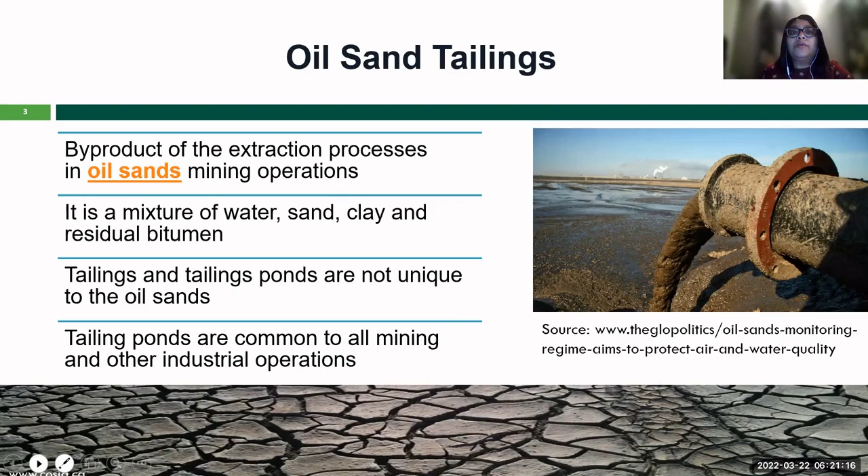What are the environmental impacts of oil sand tailings? If we talk about all the systematic environmental impacts, first of all is the toxic slurry of heavy metals and unrecovered hydrocarbons. This is the big concern. Giant ponds of toxic waste create air and water pollution. Leakage can pose a great risk for wildlife, especially aquatic organisms.

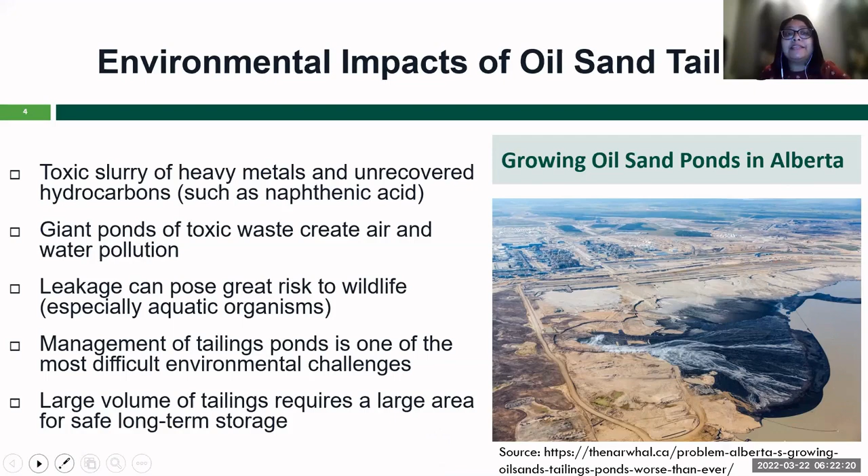Management of tailing ponds is one of the most difficult environmental challenges that we face, especially in the province of Alberta, because most of our oil sand production is from that province. And these are the growing oil sand ponds in Alberta that we can see. Large volumes of tailings require a large area for safe long-term storage. We need proper management in place so that we don't face environmental challenges from these tailings.

So what are the management processes in place in Canada? If we just summarize quickly: oil sands mining recycles 80% of the water used during the production process. So water recycling is already in place. Rather than using fresh water every time for recovery, the use of recycled water is in practice. 80% of the water used is recycled during the production process.

Tailing ponds are constructed with groundwater monitoring facilities, so that continuous monitoring is in place for groundwater pollution and any kind of leakage during contaminant transport. Steps are taken to prevent birds from landing in the tailing ponds, which can create environmental hazards.

Future tailings require smaller ponds and faster reclamation. So the goal is to have smaller tailing ponds so that they cannot create environmental hazards, and also faster reclamation, meaning the reclamation of these tailings is much quicker, so that the overall impact on the environment is minimized.

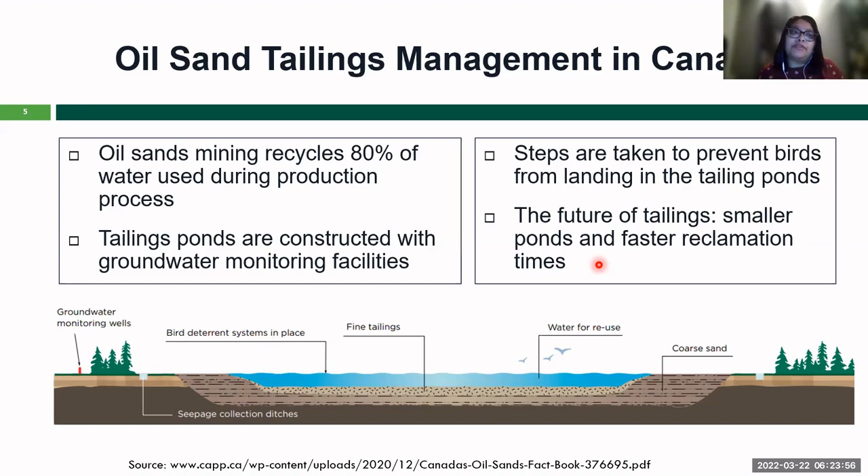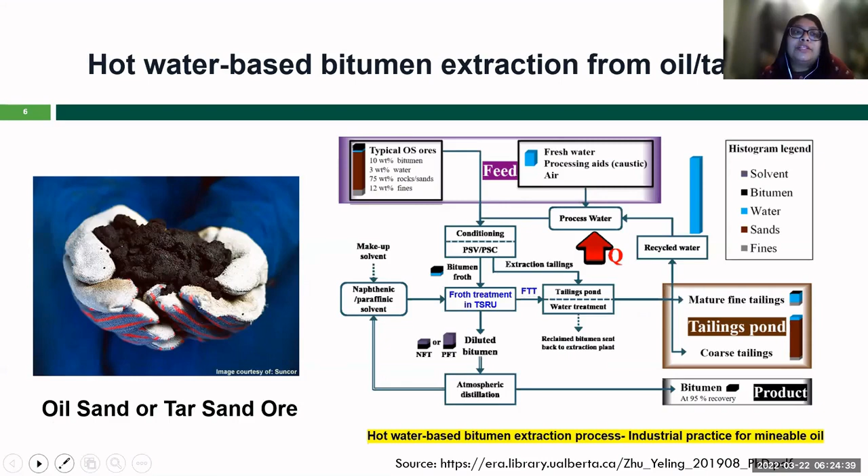What is the current processing of bitumen extraction from oil sands? Currently a hot water based bitumen extraction process is widely used, but there are some operational and environmental challenges. Because of that, solvents are used to minimize the end product of the tailings that is dumped in the tailing ponds. The solvent used for treating those tailings goes through the tailing solvent recovery units.

And the reason I'm bringing this up is because I'm going to talk about the end product coming from the tailings solvent recovery units. These units are used to strip off and recycle any residual solvent prior to disposing the froth treatment tailings in the storage pond. They are a modified version of the traditional flash columns and use temperature and pressure to recover solvent. Solvent-free tailings are then stored in the tailing ponds for future reclamation.

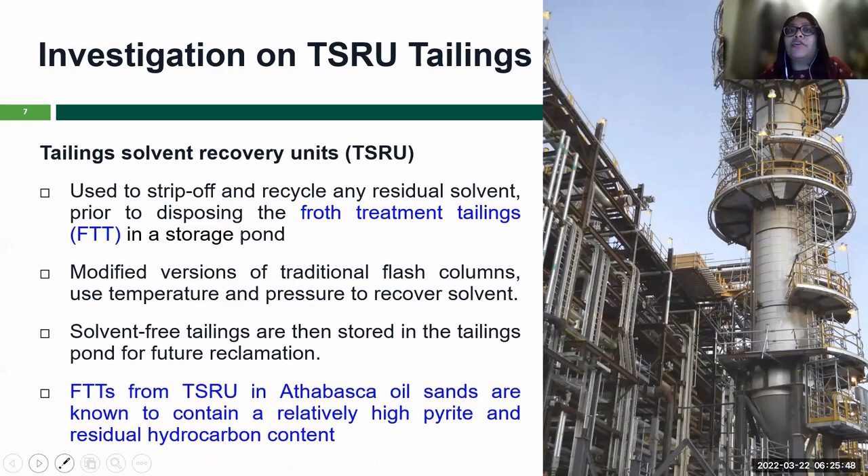And this froth treatment tailing, which we are calling FTT from TSRU, is from the Athabasca oil sand, which is a particular oil sand location in Alberta, known to contain relatively high pyrite and residual hydrocarbon content. Due to this high pyrite and residual hydrocarbon content, there are issues that we see, known as acid rock drainage from the FTT deposits.

So what is acid rock drainage? It is an acidic effluent generated from sulfidic waste rock piles or tailings. So sulfidic waste rock piles and tailings will cause this kind of rusty water, orange in color, because of the sulfidic waste rock that gets oxidized in contact with the air and the environment.

And ARD resulting from pyrite oxidation in FFTs, the fluid fine tailings, is the largest environmental liability facing the Canadian mining industry. The amount of acid producing mine waste in Canada is estimated to be 2,650 million tons, causing an environmental liability of $2 to $5 billion. So this is a huge concern.

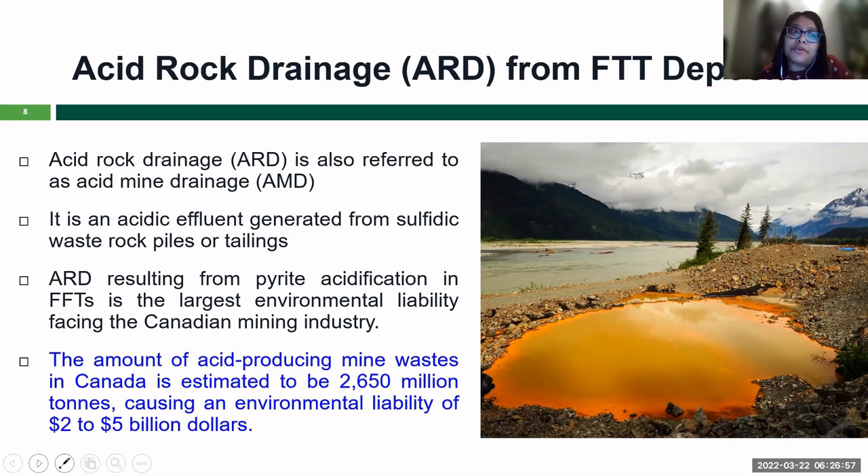And I will just go over quickly the oxidation process that causes acid rock drainage. So if you look into this equation about the oxidation process, I just mentioned the acidic toxic environment produced from the oxidation of sulfide minerals like pyrite. So this equation presented for the oxidation process and formation of acid rock drainage is in the presence of IOM and SOM. IOM is the iron oxidizing microorganisms, and SOM is the sulfur oxidizing microorganisms.

So if we now look into the ferrous iron present in the system, it oxidizes and produces ferric iron that precipitates in the system and the environment, and that also further oxidizes. And if you look into the further oxidation, it further oxidizes pyrite again in the presence of IOM, iron oxidizing microorganisms, and produces thiosulfate. Thiosulfate oxidizes to sulfuric acid, which is acidic in nature.

Sulfuric acid will create the acidic environment in nature, and there is a presence of sulfur oxidizing microorganisms in the process. So IOM is mostly present at the lower pH level. IOM is sensitive to the lower pH level, so it's present there, but SOM is present in a wide range, which creates microbial succession in the development of ARD.

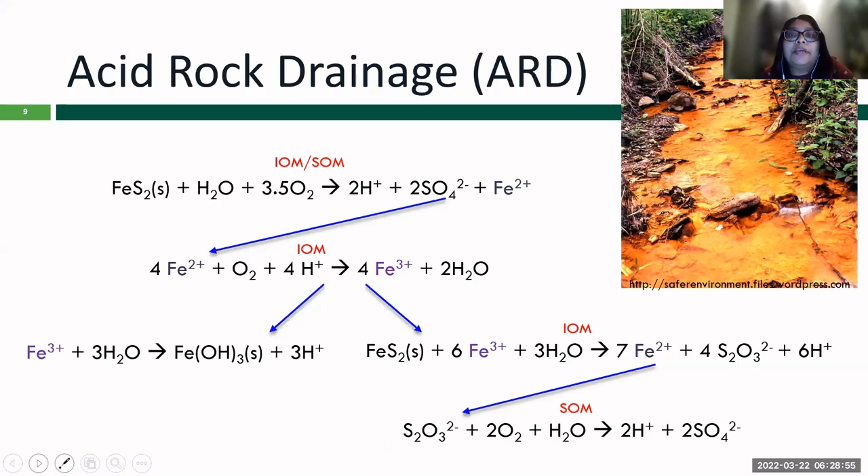So talking about ARD treatment and prevention, innovative techniques can be applied to ARD prevention. ARD treatment and prevention can be with chemical neutralization or water capping, which is tailing ponds.

And the phage present in the environment, that means the bacteria present in the environment, can be studied to understand the amount of bacteria, type of bacteria, and whether it is IOM or SOM, iron oxidizing microorganisms or sulfur oxidizing microorganisms. And then understand the process of phage transport through the tailings. So that can also minimize the sulfur oxidizing process and create a neutral environment so that acid rock drainage is no longer available.

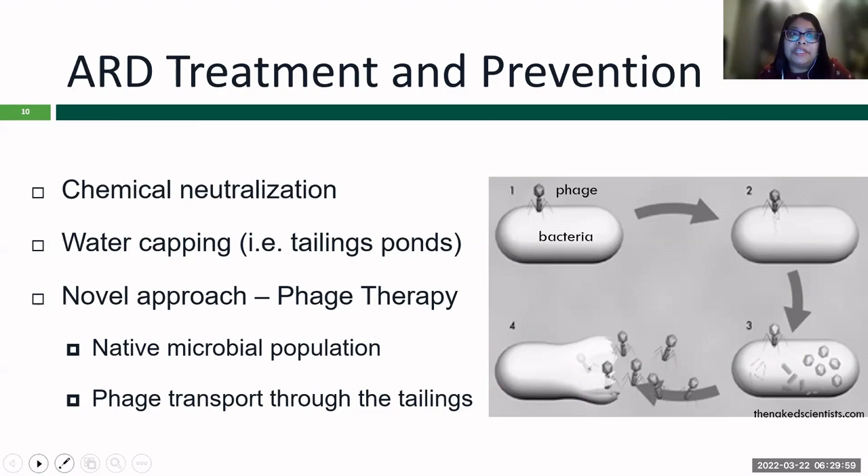Having given the background, now I'll just go over the research goal that we have looked into. So our main goal was to investigate the geotechnical and microbiological properties of untreated, polymer amended and sand mixed TSRU tailings. So specific to the TSRU tailings, we have tested a few different types of materials. One is untreated TSRU tailings and the polymer amended TSRU tailings, and then we also tried sand mixed, so that the impact of the sand was also studied, to provide information for the consideration of subaerial deposition, and increase the knowledge about these unique tailings in management application.

So if we look into the objectives and scope of the work: isolate and characterize the native microbial population of the TSRU tailings that would be related to ARD generation, and also determine the geotechnical index properties and unsaturated geotechnical characteristics of the TSRU tailings. So that was also studied.

The collection of the TSRU tailing samples was performed by the operator in June 2012. There are two types of materials collected: no polymer, so no polymer was added to the TSRUs, untreated ones, and then polymer treated ones. Then we have used the sand mix to get the overall picture that I just have described.

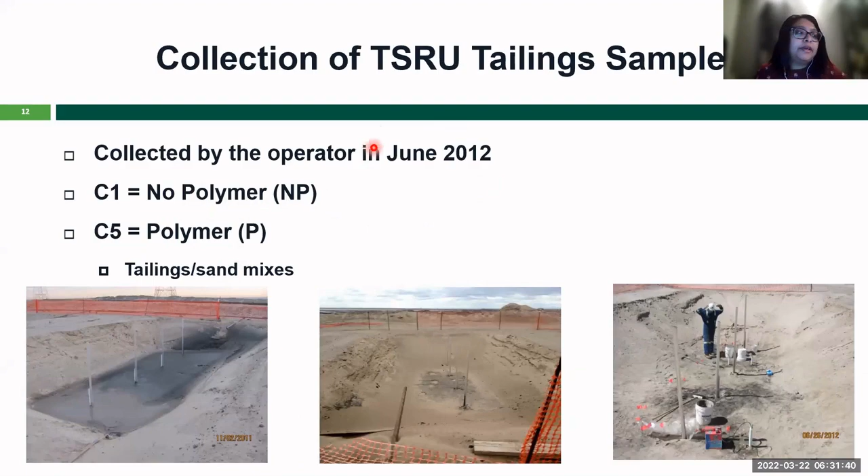So first we will talk about the microbial methods that we have used. In the microbial method, we have used 3 reactors with 3 different pH. The values shown over here are 2.5 pH, 4.5 pH, and 7 pH. In the reactor, we have inoculated with 25 grams of TSRU tailings, and we used isolation for 6 days, 120 days and 350 days when we ended the test.

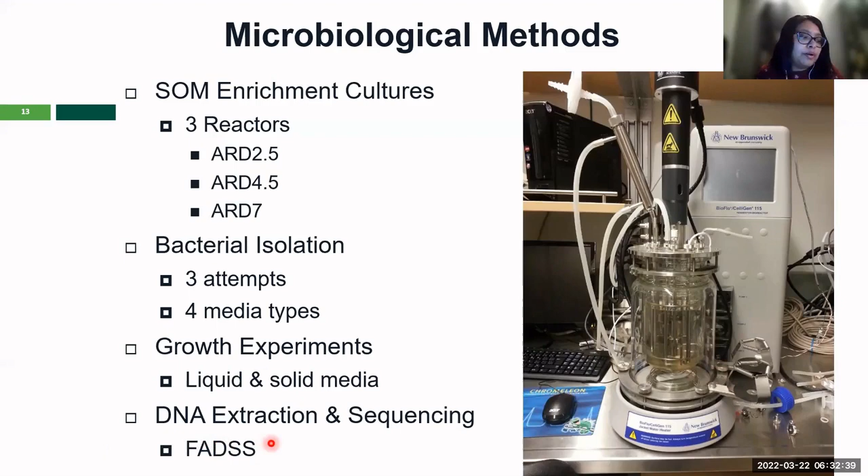And we looked into the bacterial isolation from the TSRU. We wanted to find out what are the native bacteria present in the TSRU we have collected. Then we used different media to see the growth of these microorganisms, and then worked on the DNA extraction. So what we have looked into within the 3 different pH, we can see those behaviors now.

If I just summarize them, not going into the detail because I know we are engineers, so we don't want to get into the microbiological details, but there are some interesting facts that we can talk about from here. The pH 4.5 had the highest richness with 5 isolates. That means 5 different types of bacteria were found during this isolation process. So we had 5 different isolates with pH 4.5, and pH 2.5 and 7 had only 3 different types of isolates. The units that we have here are colony forming units per milliliter.

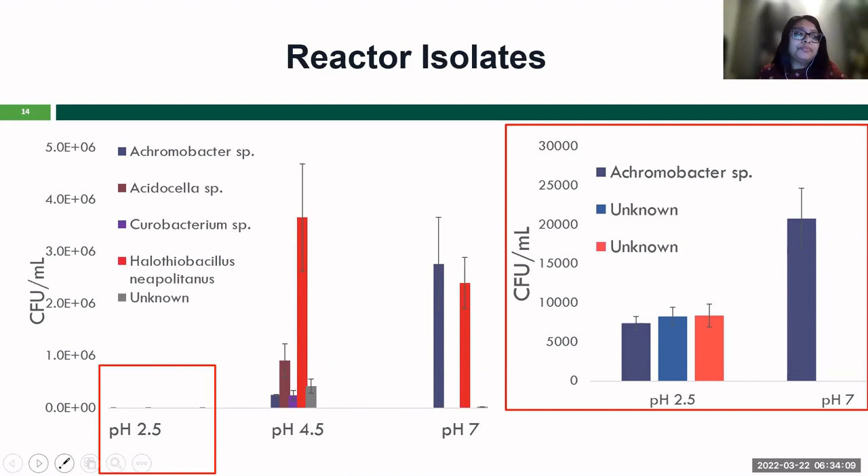Most of the isolates that we have found are known for oxidizing iron and sulfur, so iron oxidizing microorganisms or sulfur oxidizing microorganisms. 3 of these isolates are found in the ARD environment, and 1 has been documented in oil sand tailings. So that's what we can analyze from the microbiological isolates that we have found from the reactor tests that we have performed.

If we just summarize our microbiological data, we did a preliminary analysis of the microbial community that is of interest for ARD, acid rock drainage. That means 2 different types, iron oxidizing microorganisms or sulfur oxidizing microorganisms. Enrichment cultures revealed relatively low diversities using culture-based techniques. We isolated some organisms previously found in ARD sites. We checked that with the literature, and that was exciting, and established the presence of microbes capable of acid production and iron and sulfur redox in TSRU oil sand tailings. This provides a foundation for identifying microbial targets for phage therapy.

If you remember, I mentioned the innovative approach that can be taken by identifying the microbial community and then allowing that microbial community to transport within the TSRU or the sand tailings, and minimize the ARD environment. So bringing the pH level to neutral, so the acidic environment is no longer present in the tailing ponds. So that was the summary from our microbiological activities that we have performed.

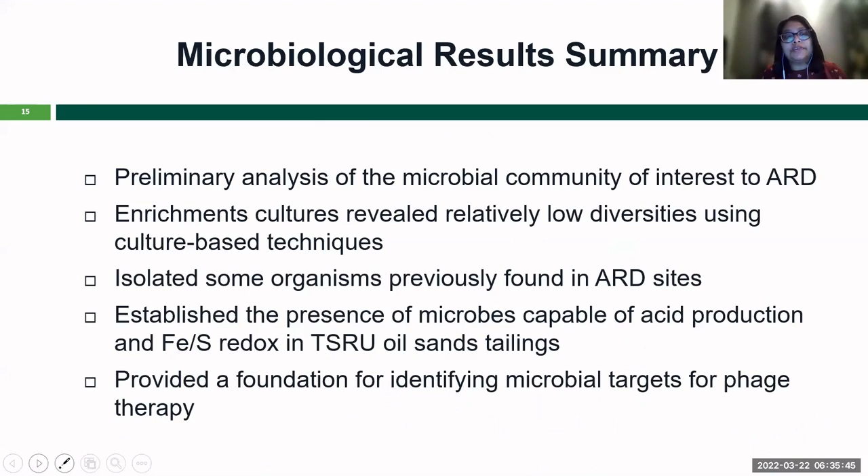Then we move on to the geotechnical methods that we have undertaken for these TSRU tailings. Our work was divided in several segments. It was identifying the index properties, as you know, all the basic index properties we perform for any geotechnical material. Then we have worked on the salinity, SEM, data analysis, and performed a shrinkage test.

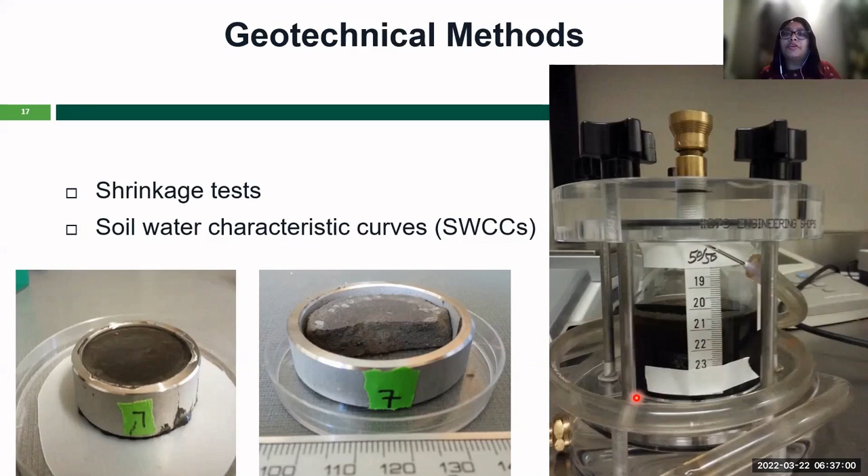It was interesting for us to look into the shrinkage test, starting with the slurry material in the rings and allowing it to dry in a natural air environment at room temperature, and then taking measurements of the height and the diameter of the material over a period of 4 months. Continuous readings were taken, and we also used a Tempe cell to look into the soil water characteristics, with suction values up to 500 kPa. Again, measurements were taken for up to 5 months, and when there were no changes continuously for several weeks, we stopped the test.

4 different types of tailing samples were used because we wanted to check the tailings without polymer treatment, and then the polymer treated tailings that we received from the TSRU site. And then we used 50% sand and 70% sand samples with these tailings. All those materials were tested for the geotechnical test summary that I have just presented.

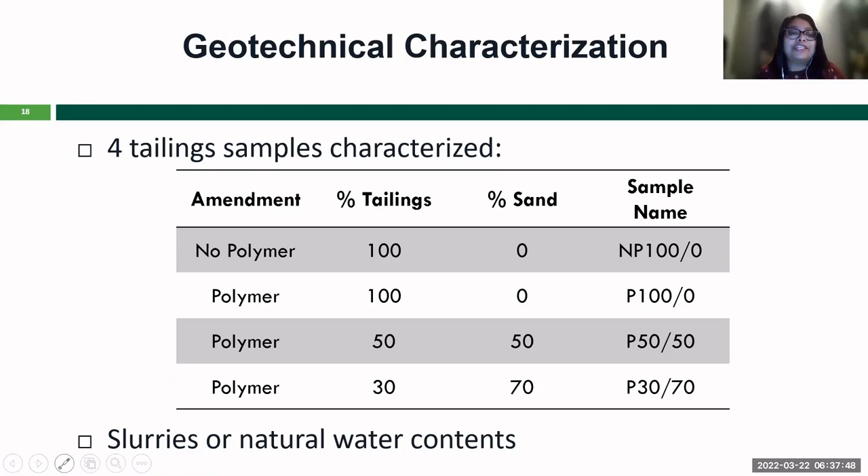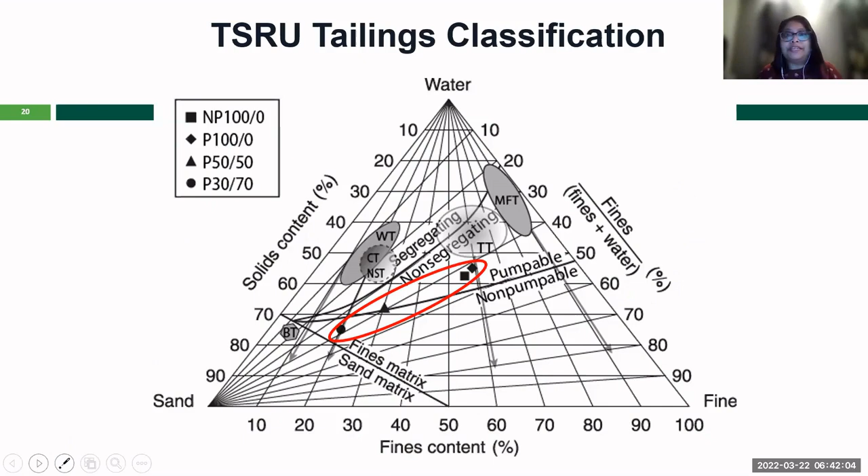And the 50% sample is between the CT and NST, which is composite tailings and non-segregating tailings, and the 30% material. So 50% is between 30% and 100%. These arrows show the direction of desaturation for the TT, CT, NST tailings in this ternary diagram. So it fits well with the non-segregating pumpable materials. All the data points give confidence in the classification of the material, which is important when we are dealing with tailings management.

So now we will look into the SEM for both non-polymer and polymer samples that we tested in our lab. This is the image for the non-polymer, and this is the image for the 100% polymer. The main difference between these two materials is that we see the floc structure for polymer amended tailings, which we don't see in the non-polymer tailings. So this is a major difference in structure in the SEM images.

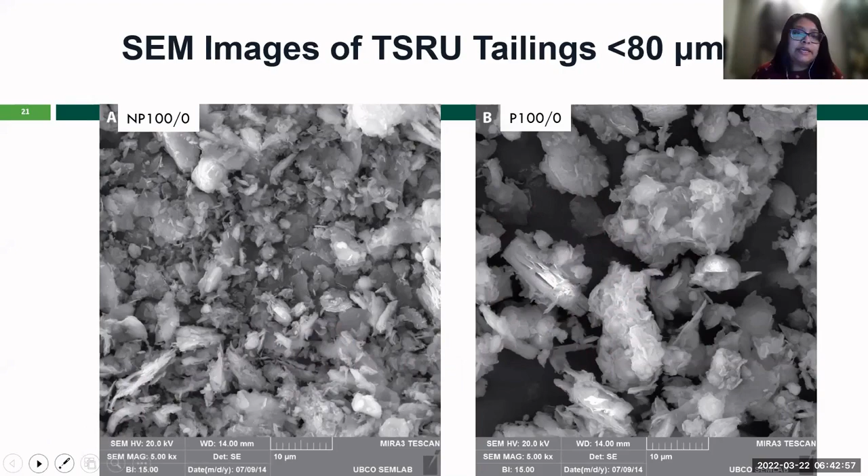Next, we will move on to our data for the shrinkage test. If you look into the data for different samples tested for the shrinkage limit, this black line over here is the line of saturation. The reason for us to look at the line of saturation is so that we can clearly see the deviation from this line for each data point for all these materials that we have looked into.

So air enters when the deviation happens from the line of saturation. And if we just look into this red line here, which shows the shrinkage limit, the intersect of the stable volume and the line of saturation. So these are where we have the stable volume and they intersect with the line of saturation for this material.

So two important things to look for here: the non-polymer 100% sample, which is these darker points here, shows the highest shrinkage limit, so 54%. And for the 100% sample, the polymer sample showed early deviation. So you can see from these points here, this is early deviation from the line of saturation. So these are the two key things that we can see. And this early deviation is likely due to the residual hydrocarbon present in this sample.

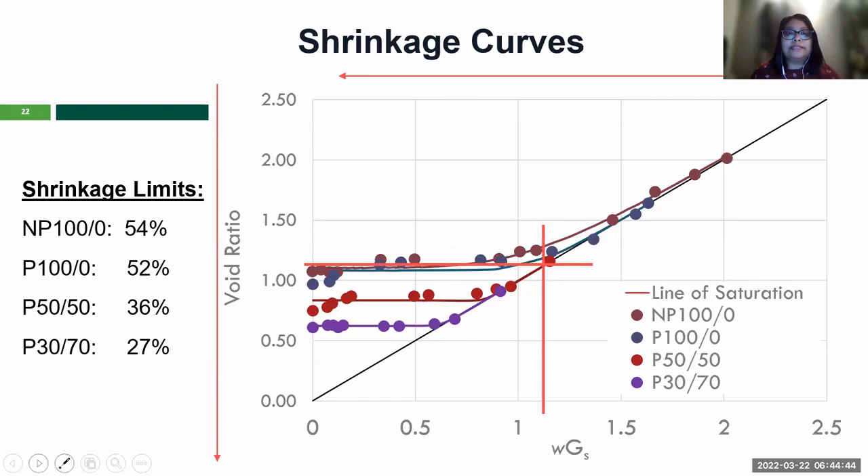Okay, now we will move on to the next data points here with the gravimetric and the volumetric soil water characteristic curve. So if you look into those data points, water content with respect to the suction for 4 different samples that we have tested, again, we are just presenting 2 different types of water content, gravimetric and volumetric. And because we have tested only up to 500 kPa suction level for this material, there is no point looking into the high suction level because we already found out what range we need to work in for these materials.

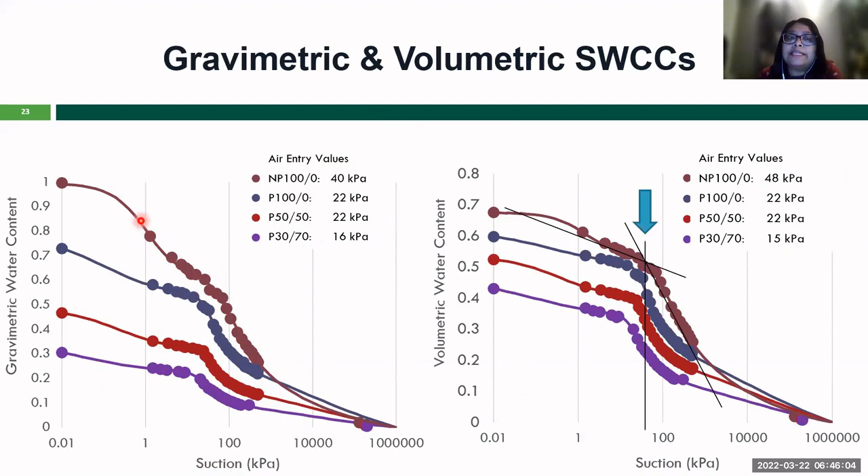And we saw that for non-polymer material, the non-treated material has a higher air entry if you compare both plots. So you see a similar pattern, and for other materials it's almost the same, identical values for the 2 different presentations that we have here. And then we have seen different shapes for the polymer treated materials and the non-polymer treated materials. So that's probably one of the significant behaviors we can see because of the residual hydrocarbon.

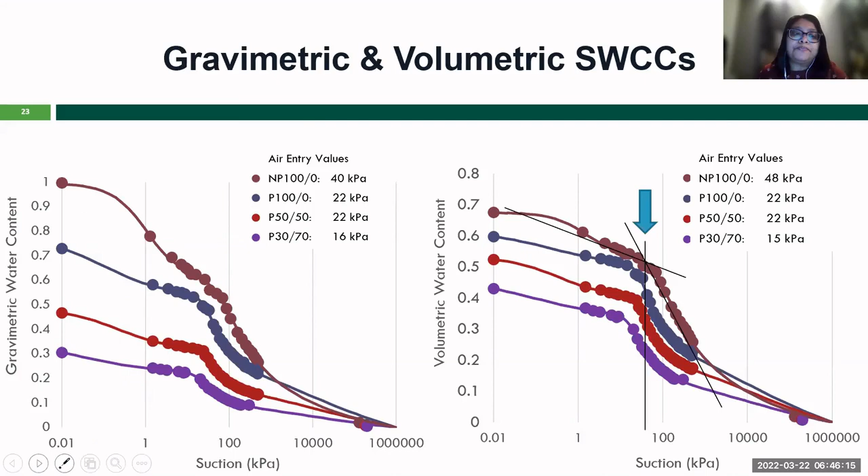And the same thing for the degree of saturation data. If we just look into that, these polymer samples behave like non-polymer samples at the beginning when there was no air entry. When they started to show air entry, then they started to behave like the rest of the materials, like the sand materials. So this is the major finding from this data.

And polymer amended samples require less energy, lower suction, to desaturate after the air entry value is reached. So that's another finding. Polymer amended samples may also contain higher residual water, and the non-polymer air entry value was bigger. If you see the value, which is 54 kPa, that's a shrinkage effect. And the polymer material has no change in the air entry value, so there is no shrinkage effect there. So that's the major difference between these two types of material: non-polymer has a shrinkage effect and shows a high air entry value, and the polymer treated material didn't have the shrinkage effect.

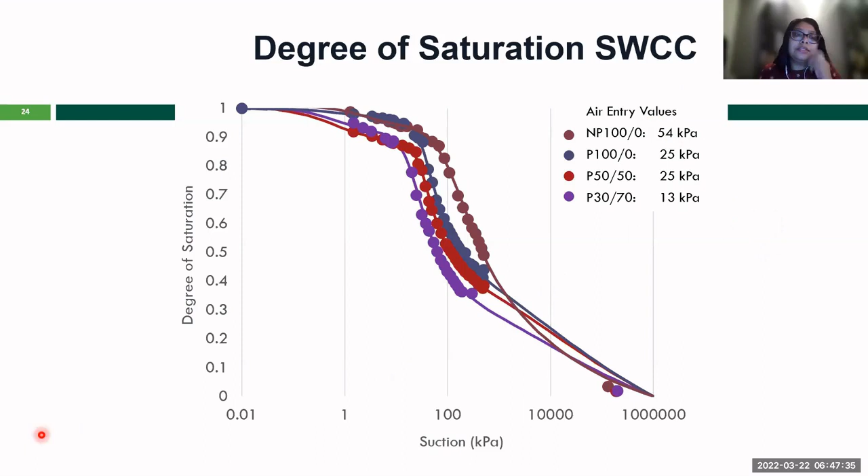So the last figure on these geotechnical tests is the self-weight consolidation that we are going to talk about here. We have only looked into the non-polymer 100% tailing samples and the polymer 100% tailing samples. The shapes are different. A non-linear shape was observed for the polymer treated sample. And this type of shape is common in the literature for different polymer types, polymer concentrations and testing conditions. So both shapes are common for polymer treated samples, but in our case, we have only seen the non-linear behavior for the self-weight consolidation test data.

So the polymer treated sample showed higher dewaterability from the data points, as you can see from these two diagrams. And we used two different densities for this material. The initial packing density for non-polymer was 1.3 grams per cubic centimeter, and for the polymer treated one, it was 1.5 grams per cc.

So the take-home message could be, for the polymer treated material we received from the TSRU unit, we saw non-linear behavior. Again, the residual hydrocarbon could be the reason that we see this kind of behavior. But in the literature, we have seen both linear and non-linear behavior for polymer treated materials, and that depends on the polymer type and concentration and the type of test performed. So let's talk about the key takeaways from here.

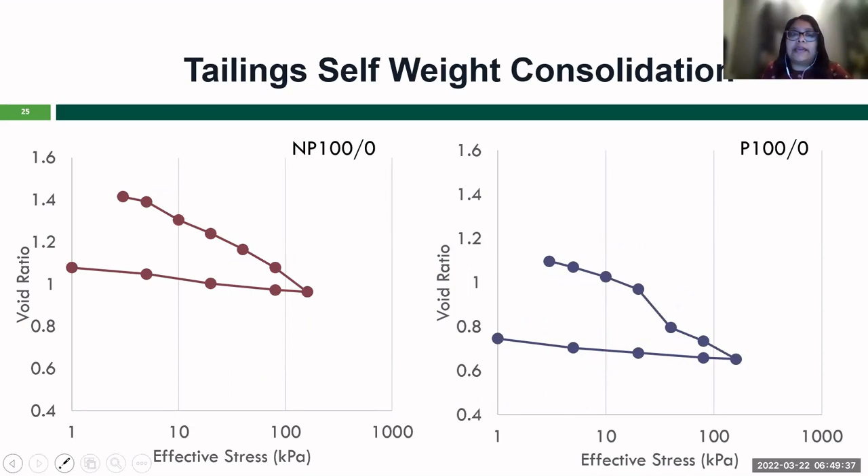From the microbial characteristics, we have identified some of the native microbial community with potential role in ARD production, either iron oxidizing microorganisms or sulfur oxidizing microorganisms. And it provides potential microbial targets for phage therapy. So we know what is available in this type of tailings, and I should not be generalizing. In the tailings that we have tested, we identified some of the native microbial community. So then we can look into the phage therapy.

Results add to the knowledge of the microbiology of the oil sands tailings, which is important because then you know how these microorganisms can be used to treat different types of environmental impacts that we see during the tailing management process. The key takeaways from geotechnical characteristics: we have seen the lower specific gravity. That was the important finding for our work, which was much lower compared to the fluid fine tailings from the tailing ponds. Polymer amended tailings exhibited better unsaturated characteristics compared to the non-polymer, and tailing sand mixes increased drainage.

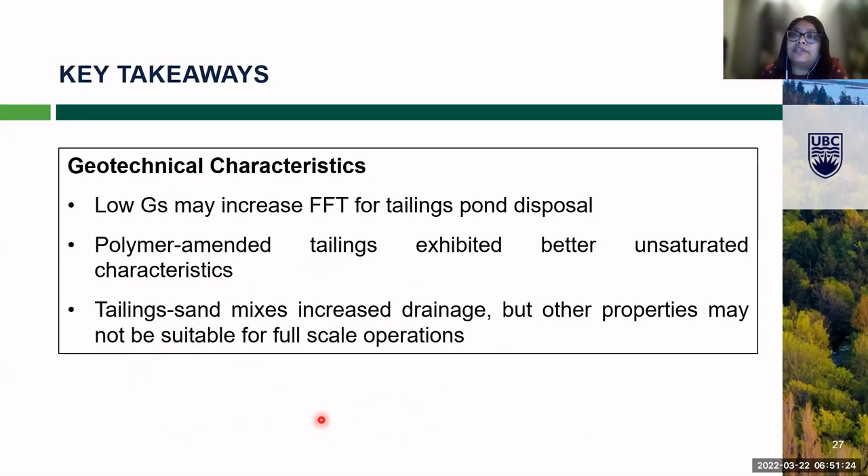So when we added sand to the tailing materials, we saw a better drainage performance, but other properties may not be suitable for full-scale operation. So we didn't see any significant impact of adding sand in the tailings if you think about the full-scale operation.

And what we can also look into as future research areas based on our knowledge on this work that we have performed: our preliminary microbiological and geotechnical characterization provided a foundation for future studies with the molecular biology work and the phage isolation, phage transport studies, and geotechnical method refinement for this material. And then we can also look into the strength testing, because now the goal is to identify applications of these oil sands tailings. We produce a lot of oil sands tailings, especially in the province of Alberta.

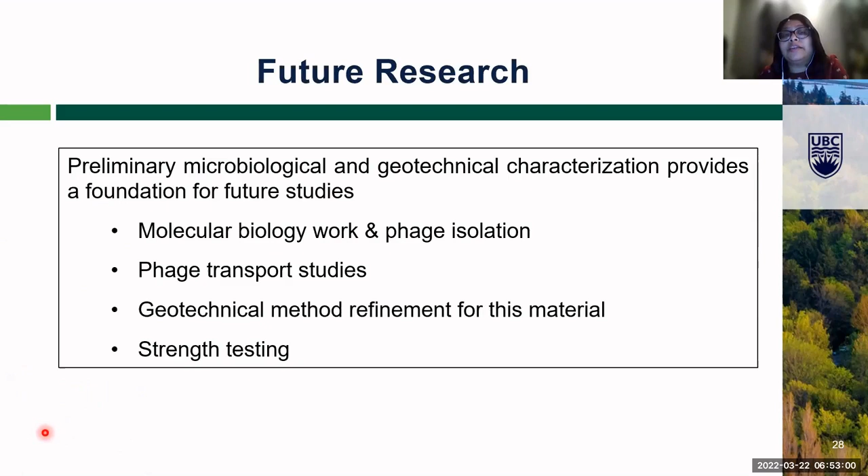Finding a solution to use value-added products from these tailing materials, either in the construction industry or in water treatment facilities, and any innovative techniques that can be developed, is welcomed by the industry itself, and also by the provincial government and the federal government in Canada, looking into the bigger picture: minimizing the impact of carbon dioxide on the environment, waste generation, and finding a solution where we minimize our waste production in any industrial activities we do.

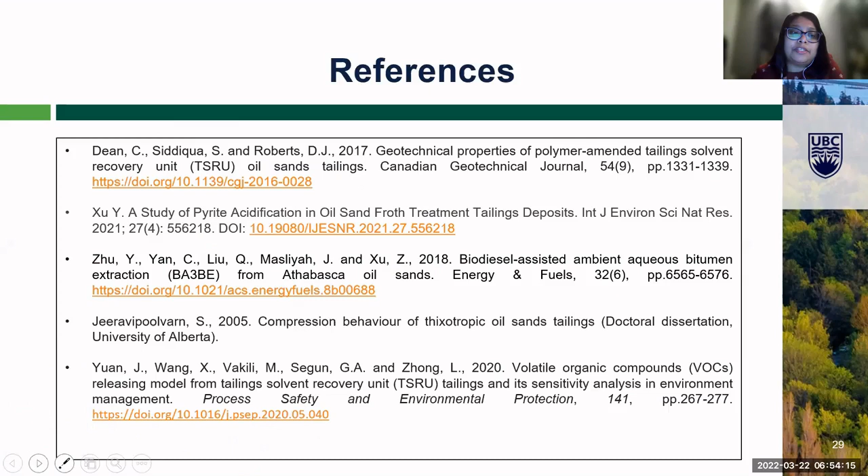Thank you, Professor Siddiqua, for this very informative talk. I'm sure that all of us have got some new insights, especially into the investigation on oil sand tailings. And I'm sure that most of these advanced techniques that we have discussed today are applicable not only to oil sand waste, but also to other similar types of waste materials.